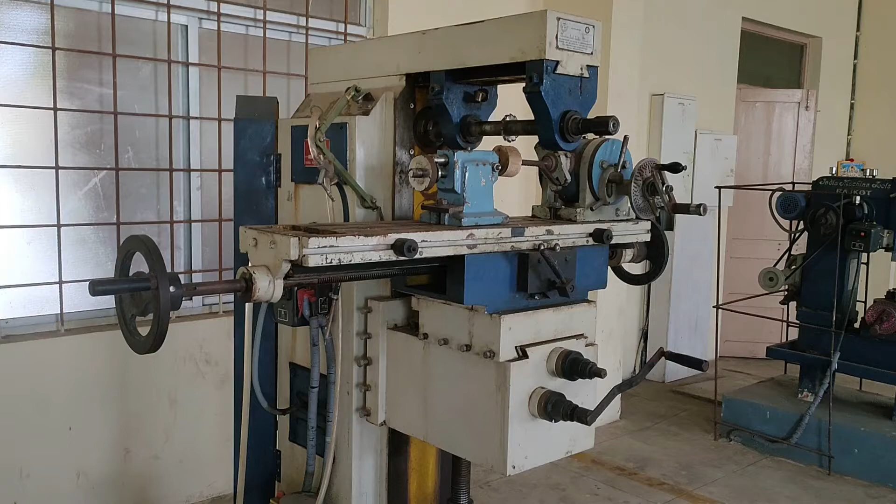Hi friends, today I am going to explain how to do a gear cutting operation on a milling machine, on a horizontal milling machine. So what is milling? Milling is nothing but removing excess material from the workpiece in the form of small chips in order to get the required shape and size.

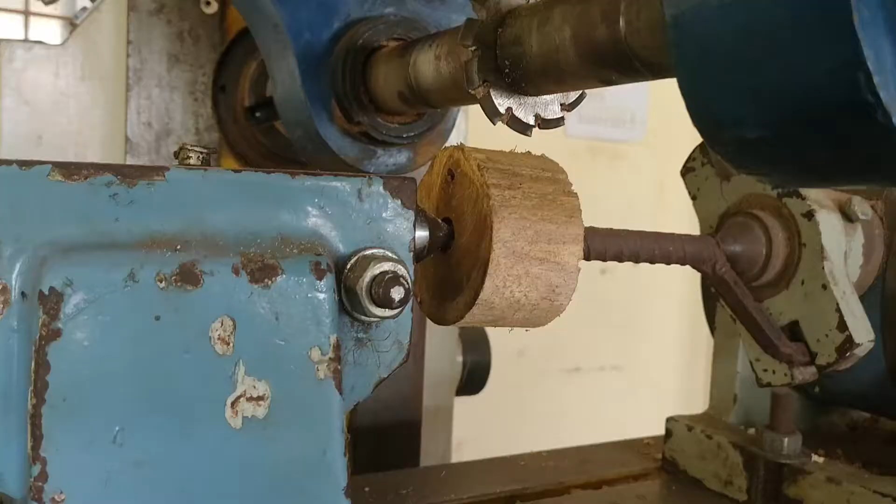By using a milling cutter, a multi-point cutter, that operation is called a milling operation. So let's see how to produce a spur gear on a milling machine. Coming to the aim of the experiment: to produce a spur gear on a given workpiece using a horizontal milling machine.

Now we will see what tools and materials are required for this operation. First of all, we require one wooden workpiece. For my requirement, I am taking wood here. If you want to take metal, you can at your wish. Then you can take one milling cutter. This is a mandrel. These are the tools and materials required for this operation.

And also we require one horizontal milling machine or a vertical milling machine. One milling machine is also required. So let's see how to do the operation.

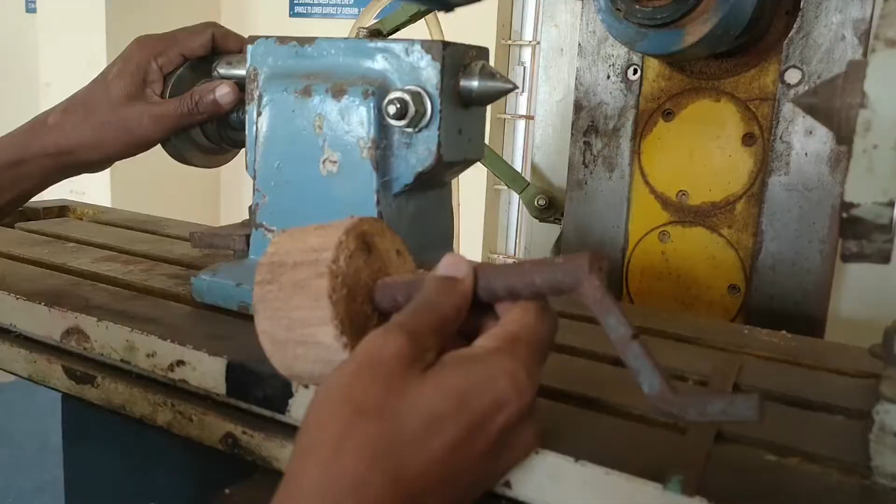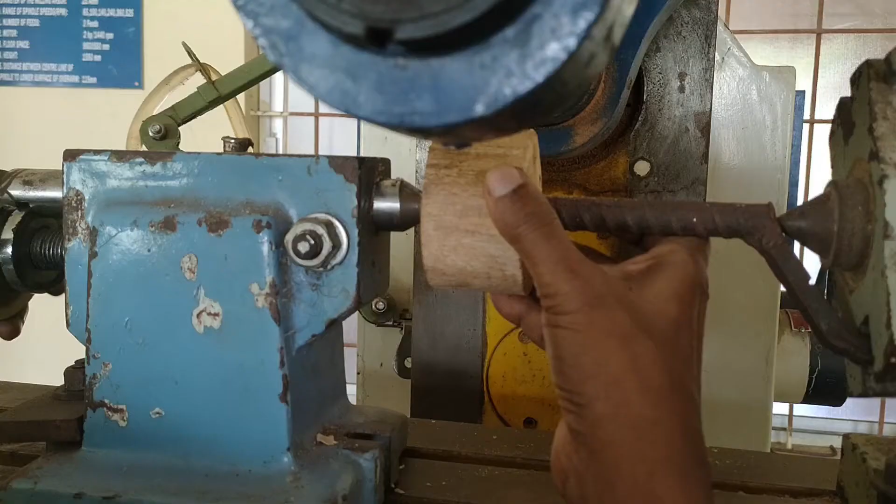First of all, you have to take one workpiece. This is the hollow workpiece that should be fixed in a mandrel. Now you can fix this hollow workpiece between the tailstock and the indexing head. Let's see how we are fixing the workpiece. In this way, you can fix the workpiece between the tailstock and the indexing head. By using the tailstock, you can fix the workpiece tightly.

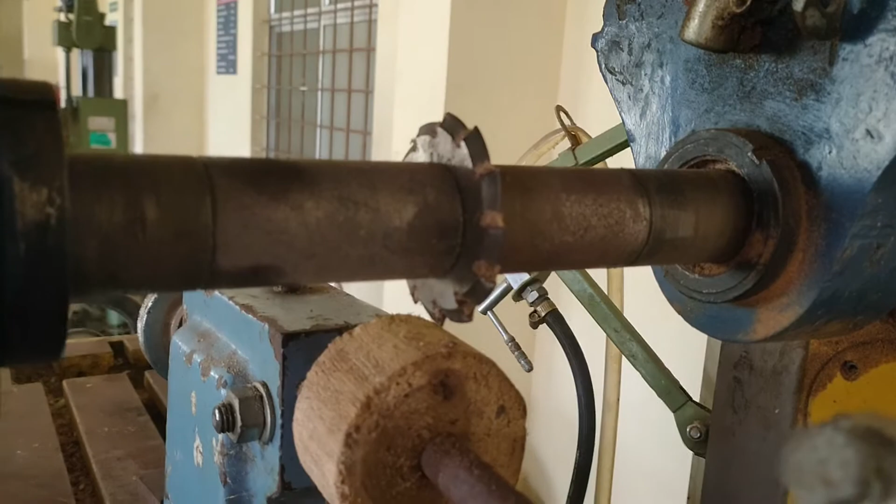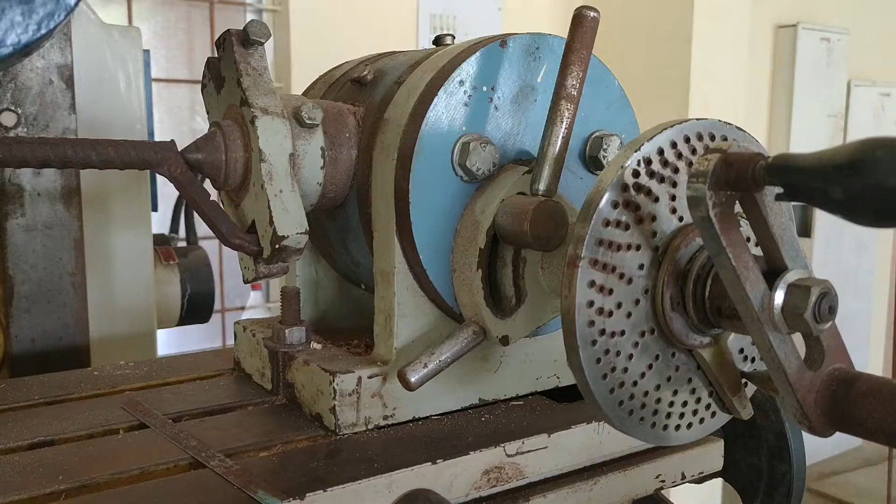Then you can fix the cutter. Here I am taking a double angular milling cutter. You can fix the milling cutter in a milling arbor. This is the milling arbor. Then you can place the indexing head on the top of the table in this way. Then indexing according to the number of teeth required. We will see what type of indexing we are using here.

What is indexing? Indexing is dividing the job periphery into a number of equal divisions. It is accomplished by a controlled movement of the crank such that the job rotates through a definite angle after each cut is over. Simply, dividing the job into an equal number of parts. We are doing this operation with the help of a dividing head. That's why this is called the indexing method.

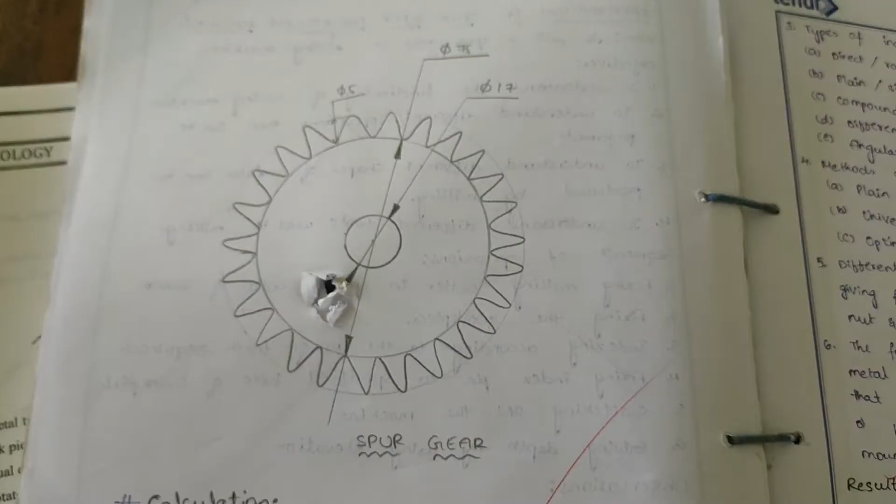We have different types of indexing methods: direct indexing, simple indexing, compound indexing, differential indexing, and angular indexing. But here I am producing the spur gear using simple indexing. First of all, you take one workpiece. The diameter of the workpiece is 75 mm and the depth is 5 mm.

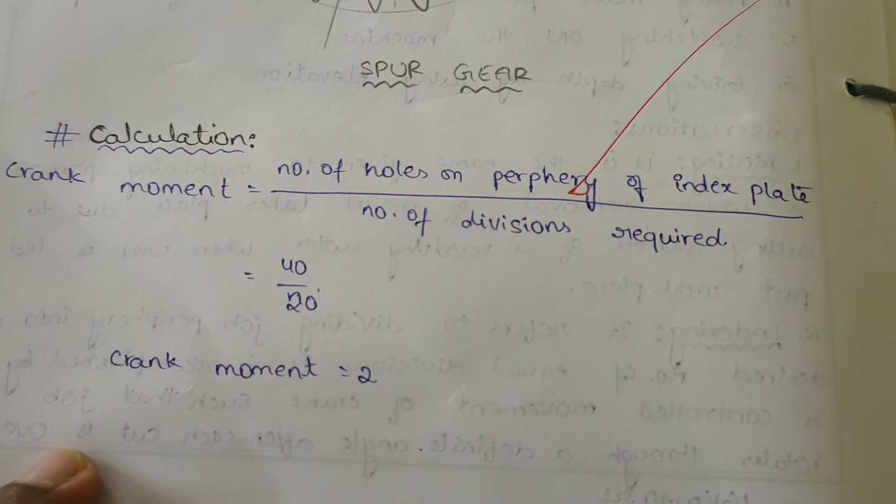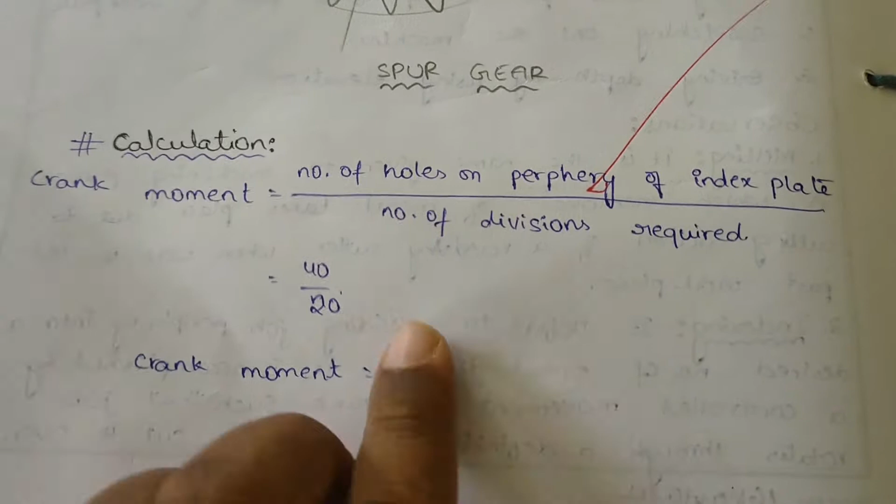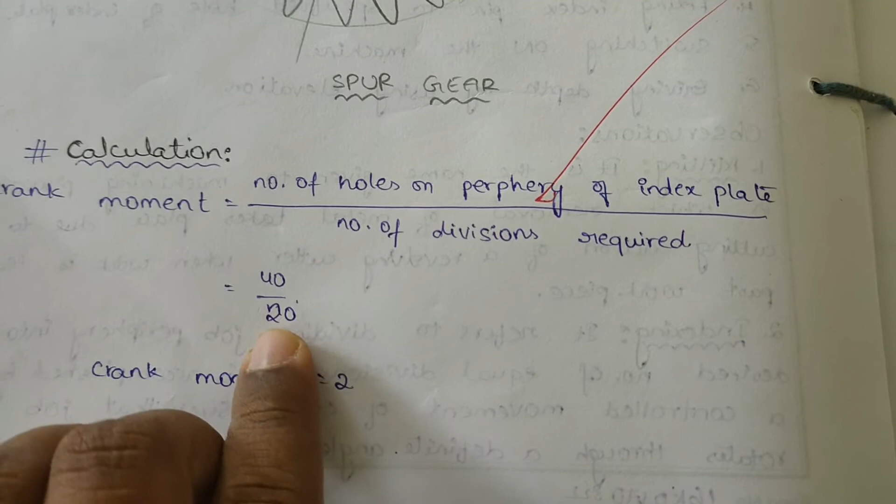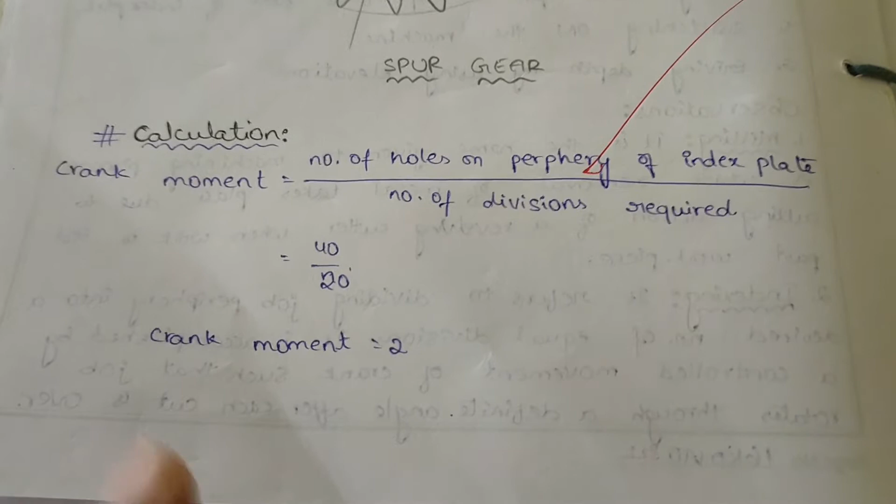Coming to the indexing calculation, using the simple indexing method: crank movement equals the number of holes on the periphery of the index plate divided by the number of divisions required. The total number of holes on the indexing plate is 40. My requirement of teeth on the spur gear is 20. So 40 by 20, crank movement equals 2. For each equal division of teeth, we have to move the crank 2 revolutions. This is the simple indexing method.

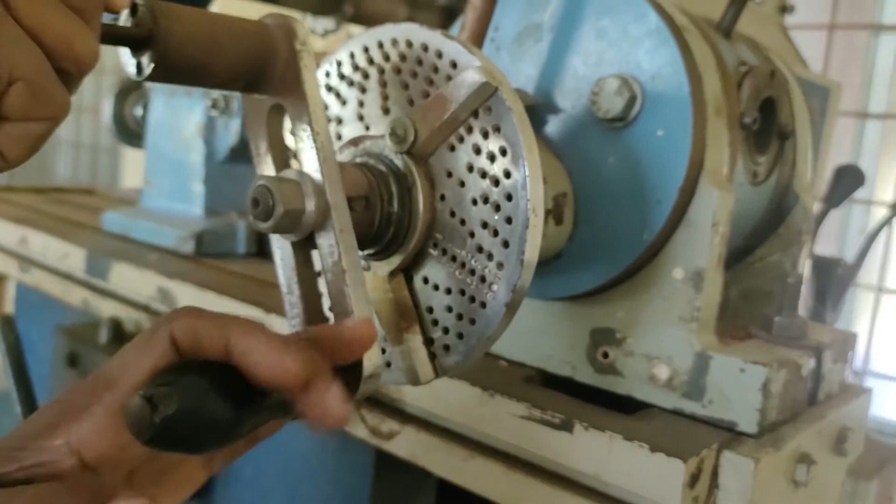Let's see the operation. Coming to the crank movement, this is the crank. Let's see the crank movement. This is the indexing plate. The total number of holes equals 40.

I am taking here by total number of teeth required on the workpiece. So crank movement equals total number of holes on the periphery of the indexing plate by total number of teeth required on the workpiece. So that is the crank movement I am using. So total 40 by 20 equals 2 revolutions.

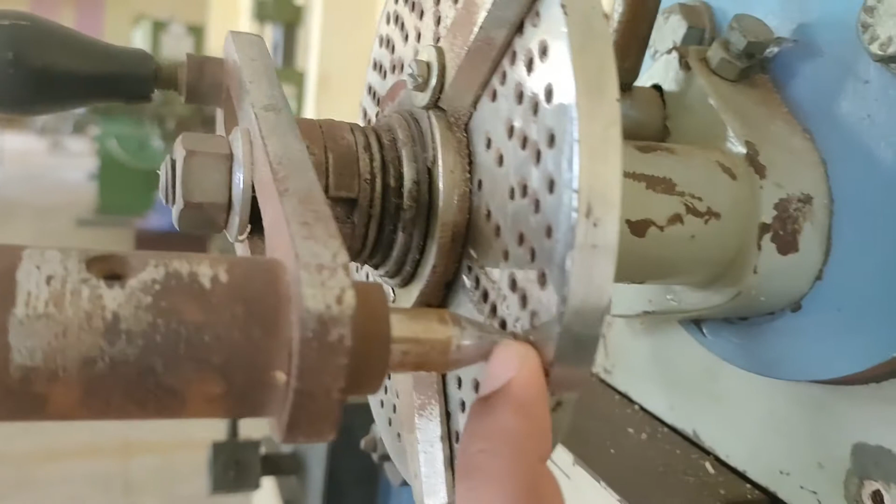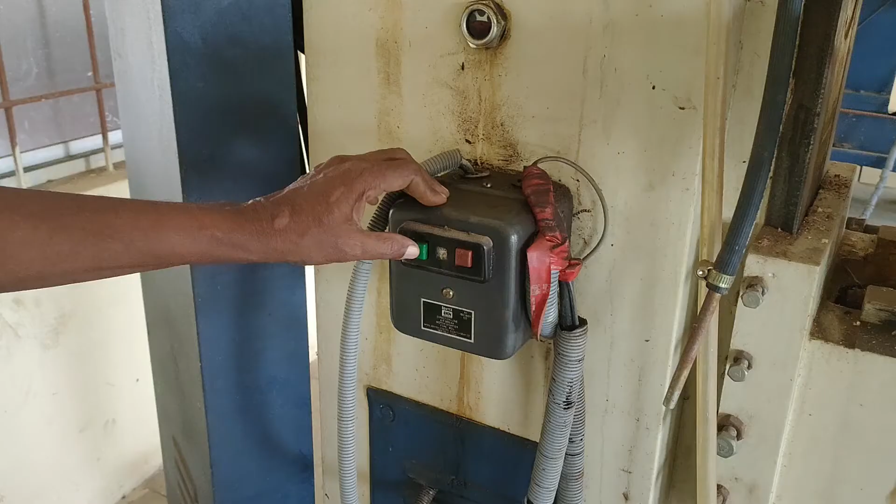Let's see the operation. First of all, you can place the plunger in 40 holes. This is the plunger. You can place the plunger at this particular point. This is the initial point. So these are the 40 holes. So first of all, you can switch on the machine. When we switch on the machine, then you can check the perpendicularity, whether the cutter is perpendicular to the workpiece or not.

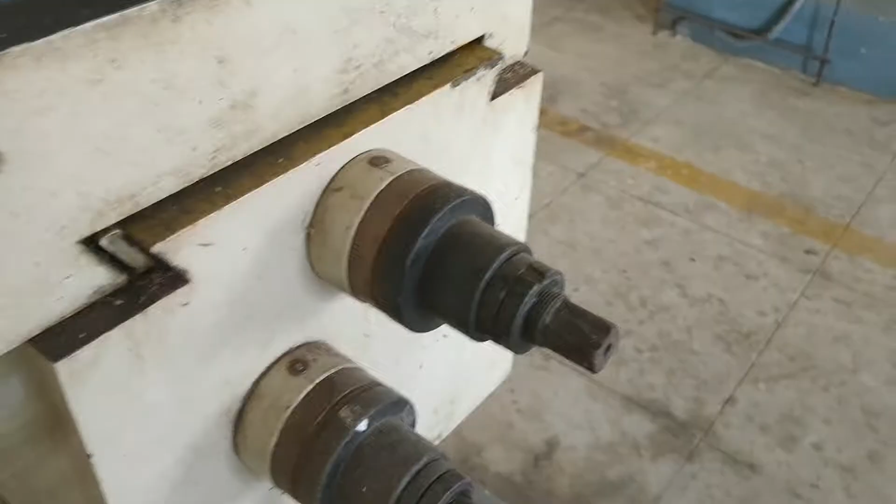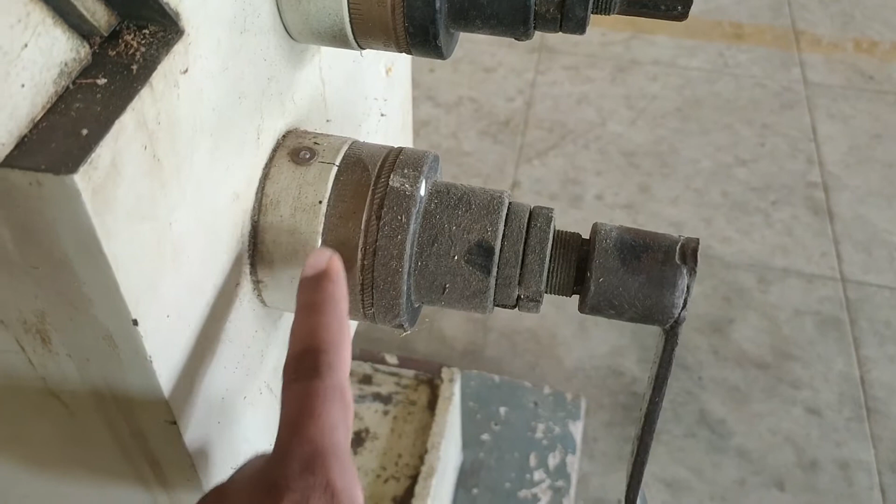So yes, then you can give depth of cut. This is the vertical traverse handle which I am moving here. This is the longitudinal traverse handle. This is the vertical traverse handle. By using this vertical traverse handle, we are giving depth of cut to the workpiece. A micrometer is provided on the vertical traverse handle. First of all, you can adjust the vertical traverse handle to 0 degrees. So this is the micrometer 0 degree.

So now I am increasing the depth of cut. This is a wood workpiece. There is no problem while increasing a heavy amount of depth of cut. This is a 5 mm depth, not 50 mm. So in this way, I am increasing the depth up to 5 mm.

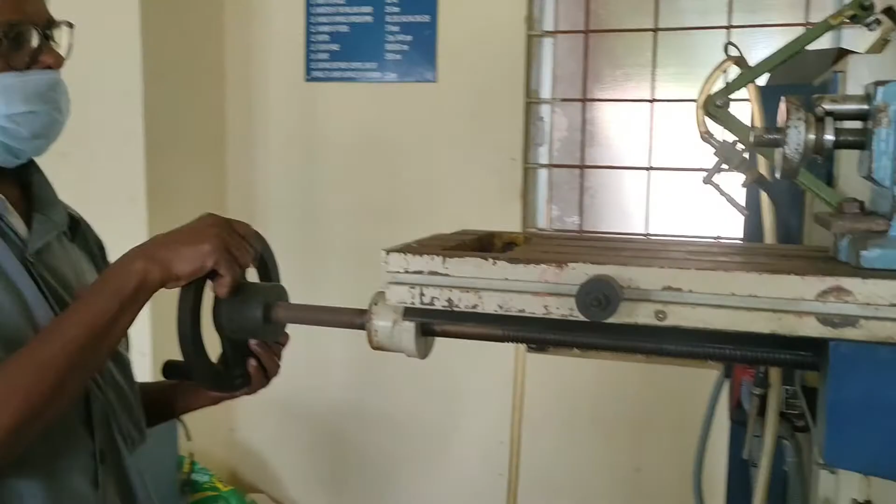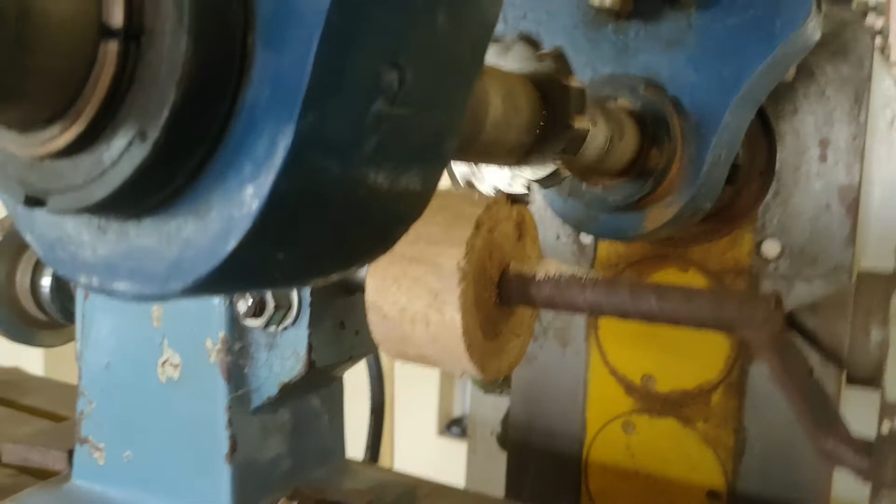So let's see the operation. By moving this handle, in this way we are giving feed to the workpiece. Actually here, the cutter and the workpiece feed travel in the same direction. So this is a down milling operation. Both are in the same direction.

So friends, now I am moving the crank two revolutions. The first revolution is completed. Coming to the second revolution. So this is the second revolution. Why? Because crank movement equals total number of holes 40 by total number of teeth required 20. So 40 by 20 equals 2. That's why I am moving this crank two revolutions.

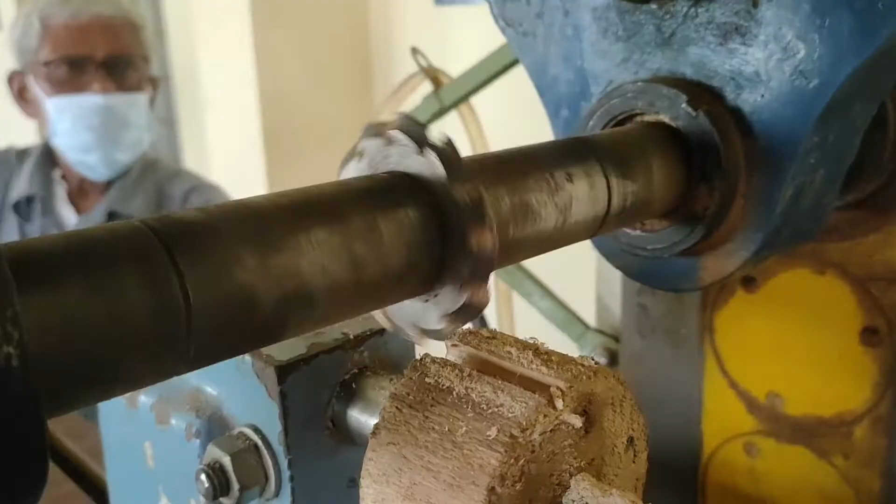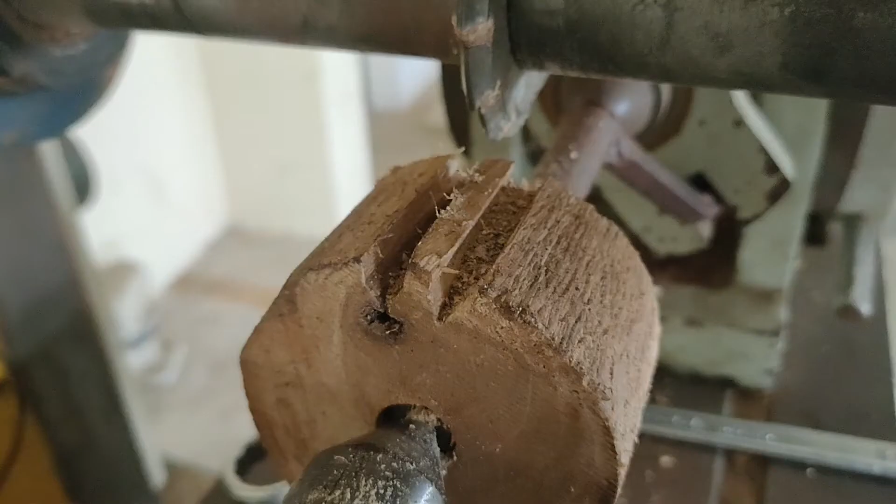When we are moving the crank, there is a slight distance moved from one tooth to another tooth. So now the second tooth is produced on the workpiece. Let's move to the third tooth. When we are moving the crank, there is a movement of the workpiece from one tooth to another tooth. You can observe it. So now I am producing the third tooth.

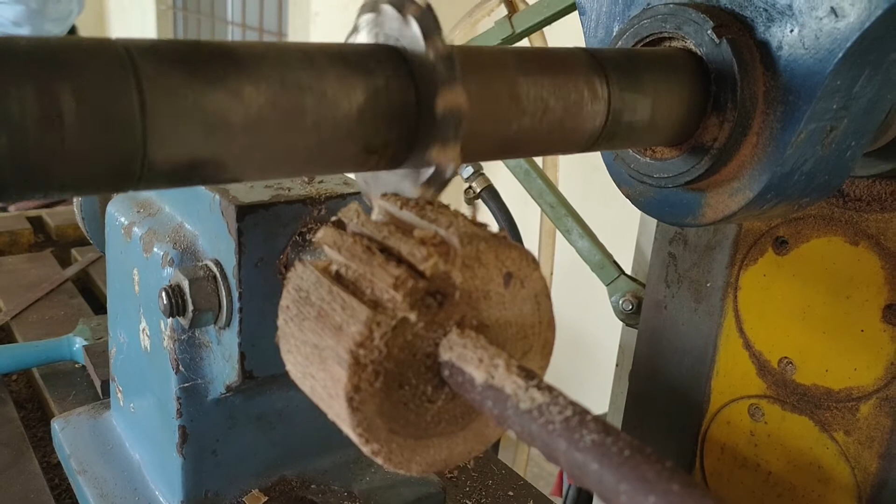Now I am moving the crank. When there is a crank movement, there is a slight movement in the workpiece. So now I produce two revolutions. Now coming to the operation. So now I produced the fourth tooth also. Let's come to the fifth tooth.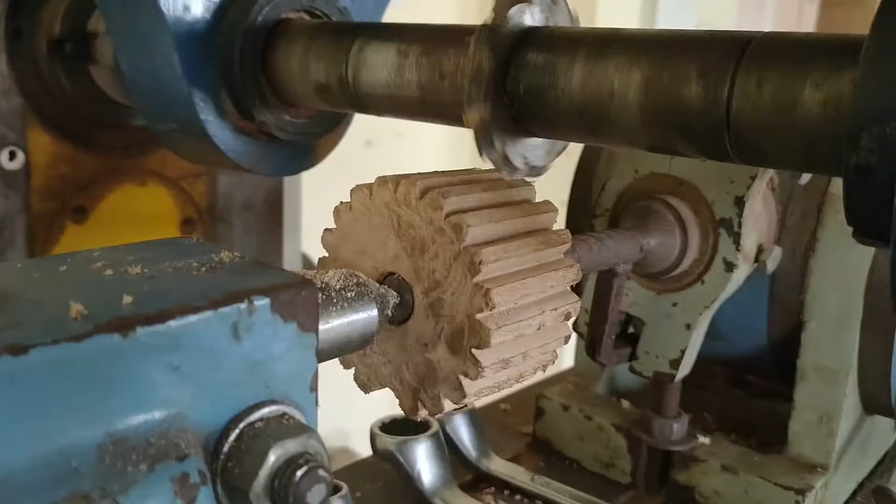When I am moving the crank handle, there is a slight movement in the workpiece. In this way, I am moving from one tooth to another tooth. This process is called indexing. After doing repeated operations, now this is the final operation. In this way, I will produce a spur gear on a given workpiece. We will see the final output.

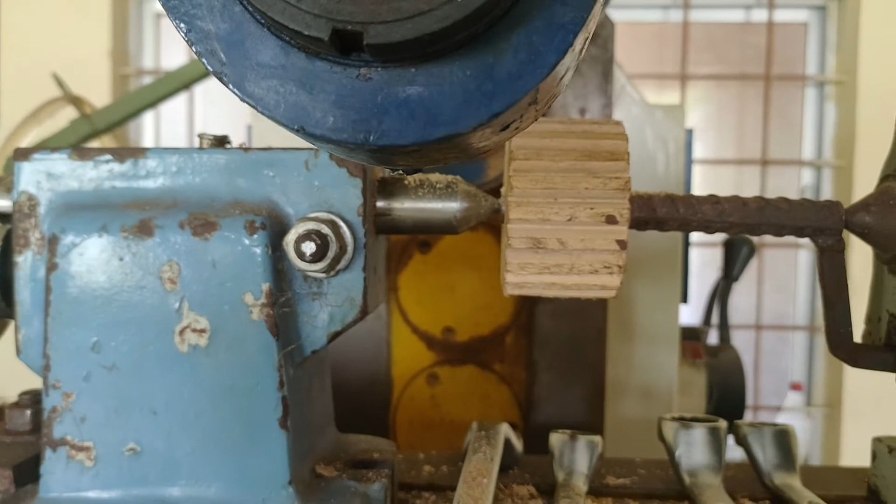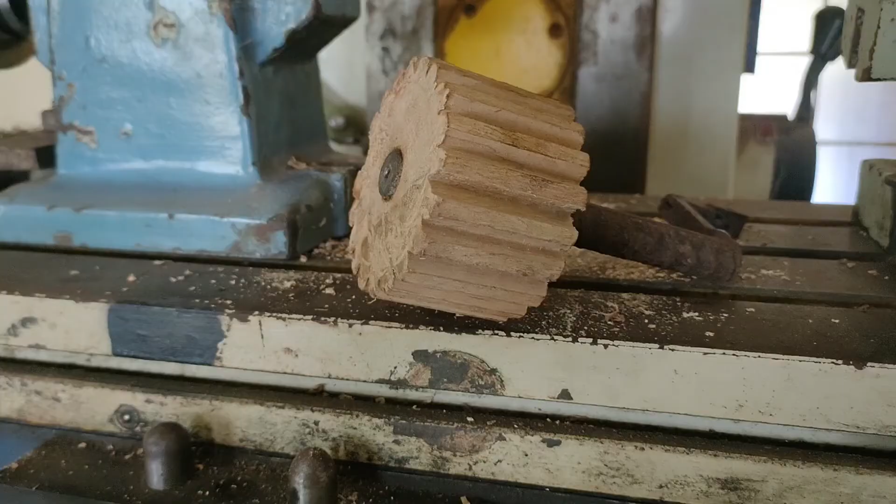Now I am removing the workpiece. So this is the final output. This is the spur gear produced on the given workpiece. In this way I am producing the proper spur gear on a given workpiece by using a horizontal milling machine.